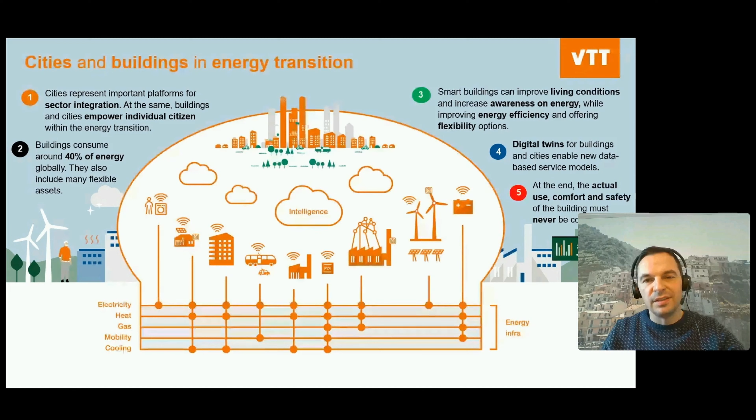The development is, of course, going towards digital twins, and we are doing that very much on our side. This is really an exciting pathway for new, more data-based service models. And just the final point here: it's always important to keep in mind that the actual use of the building, actual comfort, and actual safety must never be compromised, whatever we optimize or provide flexibility from the building.

So our research that is kind of linked into this topic, we are working on demand response, we are working on virtual power plant schemes, and just to simplify, a virtual power plant can be called a collection of distributed flexible assets that can be controlled as one entity towards the market or towards the grid.

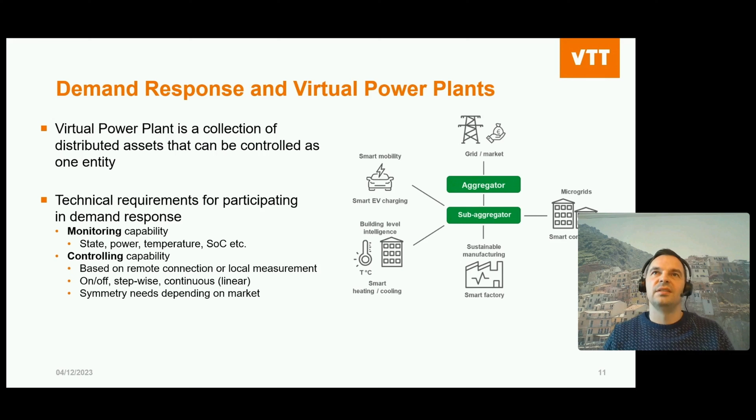And of course, there are two technical requirements for this. We need to be able to monitor these assets, and we need to be able to control these assets. And that's fairly simple as such. But of course, it requires that we have systems, we have the connectivity to different kinds of assets so that we can control them. And whenever you go into smaller and smaller unit sizes, this will be more challenging because it must also, of course, be cost efficient to control them.

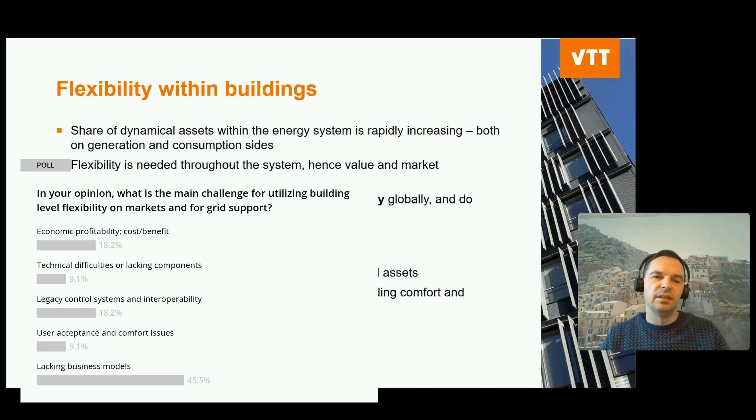So we have been looking at the flexibility options within buildings. I was already speaking a bit about this, and there was also something in the intro. But as said, much more dynamics is now seen in the energy system, and also the consumption side must contribute to the flexibility. And there is true value arising on the markets, and it can be seen that if you are operating a large fleet of buildings, this will become an additional value chain in the future, to be able to control that for different kinds of markets and take out the benefits there.

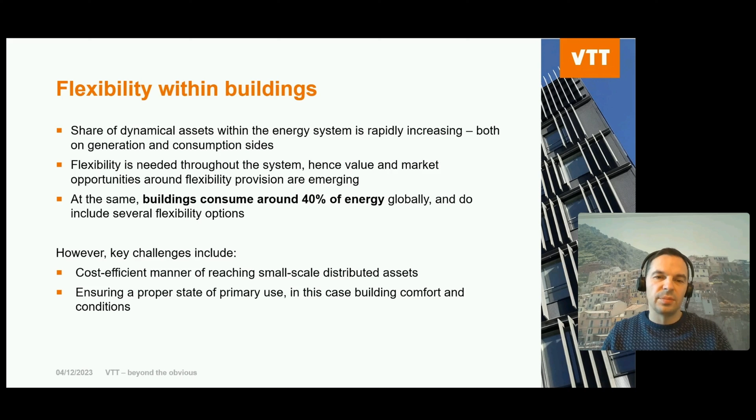Of course, the key challenges I was already mentioning: when you are going into very small scale assets like a single heating unit or whatever, you need to be really cost efficient in reaching that unit. So no massive installations should be used there. And as I already had in the first slide, of course, ensuring the actual primary use of the building and not compromising with that. So we have been looking at sub-aggregator models.

So we are assuming that there are actors who already hold a portfolio of distributed assets, and they also know the primary process or primary service, and they already have a backend system for communication and control towards the devices, and they also have the customer in their portfolio, so to say, but they are not really active on the energy market at the moment. They don't have balance responsibilities and these kinds of factors.

And of course, we have some examples here. The EV charging operator is a very typical such case. Heat pump providers, we actually already have commercial services emerging in this area. Different kinds of building management systems, that's a really developing area. But actually, when you start to think about this, there are many areas in society where you can find these kinds of things. So there are remote connections for maintenance and monitoring, but not really a utilization in terms of market flexibility, for instance.

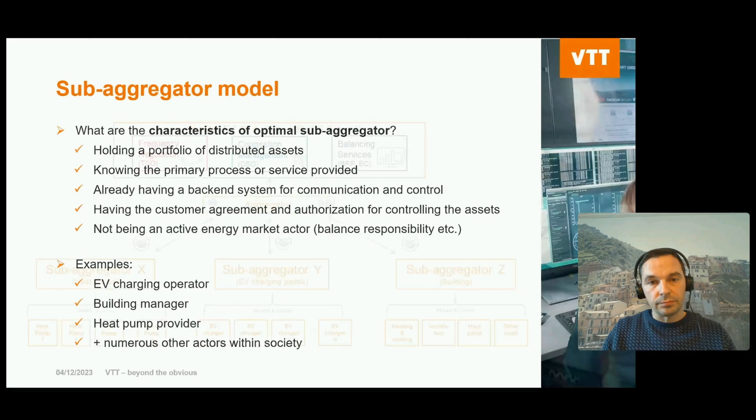So how our model works. We are kind of introducing a new actor in a sense. So we have an aggregator towards the market or towards the grid services, and then we are introducing the layer of a sub-aggregator, or a technical aggregator, who has the features that I was already speaking about on the previous slide. So they do have the backend system for monitoring and controlling the devices. And there are different kinds of those units, of course.

What is important here is that this is not only a technical model. Actually, the technical solution is a small part of this. Instead, we are working on the business model side. What are the market rules? What are the logics for responsibilities, who will allocate what, and so on. So there are actually a lot of things, going into the level of contracts also, who has the final contract with the final customer, and so on.

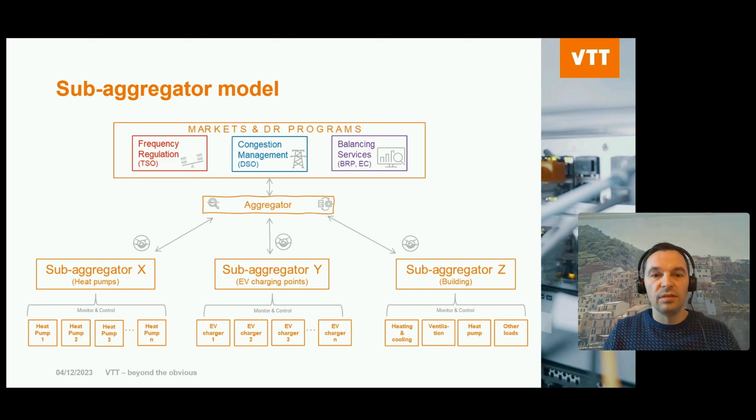What is the model for sharing the economic benefit also towards the final customer? So these kinds of things we are working on very much at the moment. And as I said, this starts to look very applicable in different areas of society, also of course within buildings.

These are just examples, but there are some important areas we are looking at, like on the left-hand side, how to share different responsibilities and benefits. For instance, who takes care of which process. On the other hand, in the middle part, what is the actual interface? This is from the EV charging case, but there are different ways of doing the actual interface, whether you're installing something more or whether you are opening or selling your back-end system to an external operator to some extent. So different logics, and we are looking at different

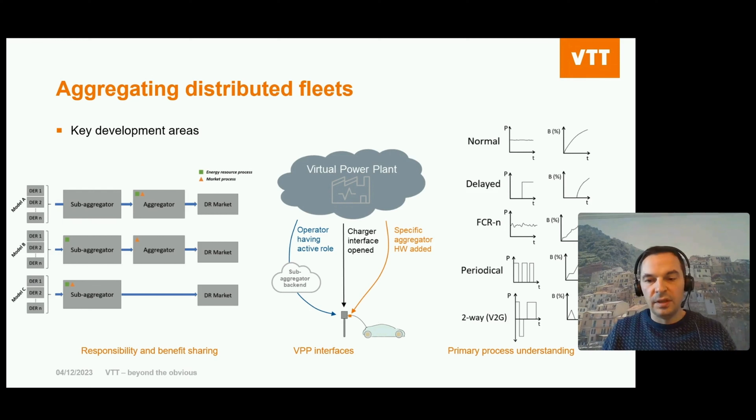opportunities there. And of course, on the right-hand side, you need to understand the primary process. Again, here we are speaking about EV charging in the example, but you really need to understand what is happening there in real life.

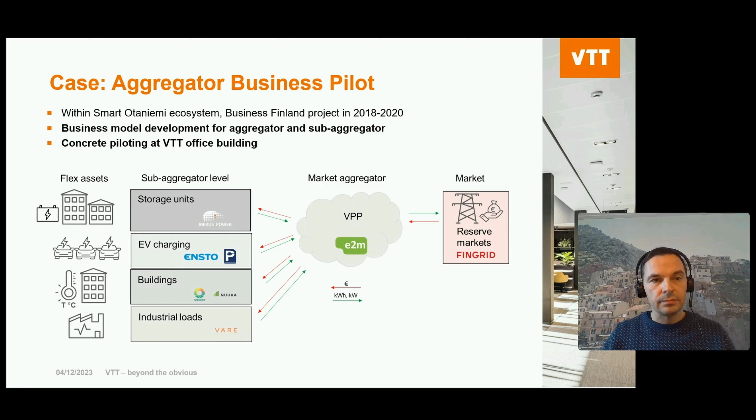I already spoke a bit about this, but this is really important for the building case. So of course, it depends on what kind of flexibility we are speaking about. If we are speaking about longer term controls, if we do, for instance, optimization of the spot price on an hourly level, then we can do things with 1 hour time steps. That can already be quite heavy if we speak about heating or ventilation or cooling. So that can already maybe start to be seen somehow by the final user.

On the other hand, we are also speaking about different kinds of reserve markets, frequency containment markets, where we are normally in time steps of some minutes. So it can be 10 minutes or 15 minutes, or even it can be seconds only, very short durations actually. And now the point is exactly to look at within the building what are the possibilities and which can be matched with which kind of market, so that we can do reasonable combinations. This is important. And this is maybe not done fully at the moment.

And for the sake of this, the controls that we are normally taking are quite conservative, so to say. So we are really careful in utilizing the potential within the buildings. And this is actually where the digital twin can bring in a lot of value. So more real-time awareness of the status of the building, more accurate controllability, so we can go on a more local level in controlling different parts of the buildings. And then of course we have a lot of really advanced functions like human thermal models, for instance. We are also running in our own research platforms different kinds of AI algorithms and so on to forecast how it looks from the user perspective, for instance.

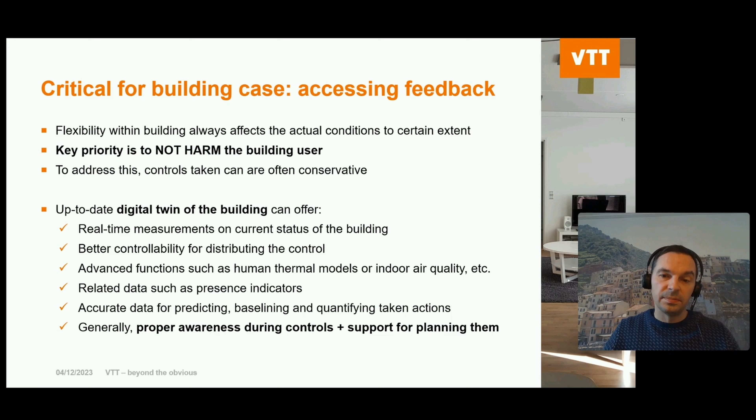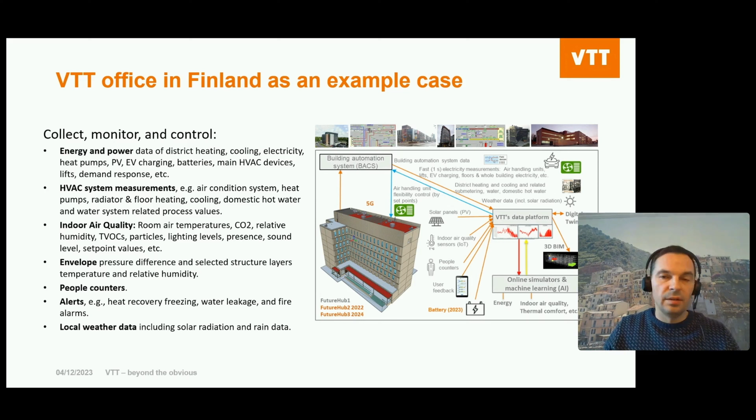I was already speaking about our office, so I will go through this pretty quickly, but this is our new office building. Actually, we have already a second part of that building open as well, in Otaniemi, in Espoo. We are collecting a lot of data. We are monitoring different parameters. We are able to control a lot of things. And everything is brought into our own research platform. And that's our own playing field for all these topics.

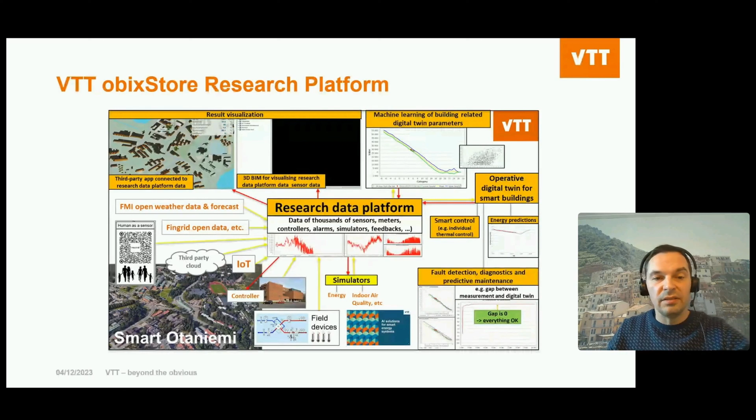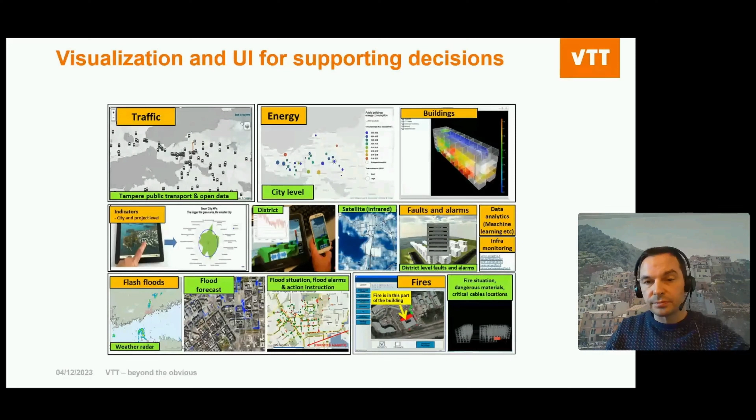So we have things related to machine learning. We have, as I said, digital twin. But we also put a lot of effort on how to visualize the data, how to present the results, and so on. But these are really cool things running there, predicting how the building will be behaving and so on with AI systems. Okay, this is just another slide about the visualization and also user interface side. So different kinds of KPI indicators, different kinds of map presentations, 3D models and so on. So a lot of different things there. But I will skip that.

Yeah, just to conclude, as I said, there is a lot of potential for flexibility within the buildings. But on the other hand, buildings are also kind of challenging because there are the individual users and they have different feelings about their comfort, for instance. So it's also kind of sensitive in that sense. Buildings are also quite diverse. So there are different kinds of buildings, different kinds of uses. But on the other hand, if you look at a bigger mass of buildings, then it starts to be more and more similar and more predictable when looking at the whole building fleet.

Yes, building management, building automation, that can be the shortcut, so to say, into this kind of sub-aggregator model. And I was also already speaking about digital twins.

As a final note, as I said, these different kinds of flexibility options, these different kinds of sub-aggregator roles, can be found everywhere when we start to look around. So there are pumping stations, there are different kinds of heating or pressurized air stations where you have some kind of a buffer, and you also have a remote connection there. And these are really interesting places we are currently looking at.

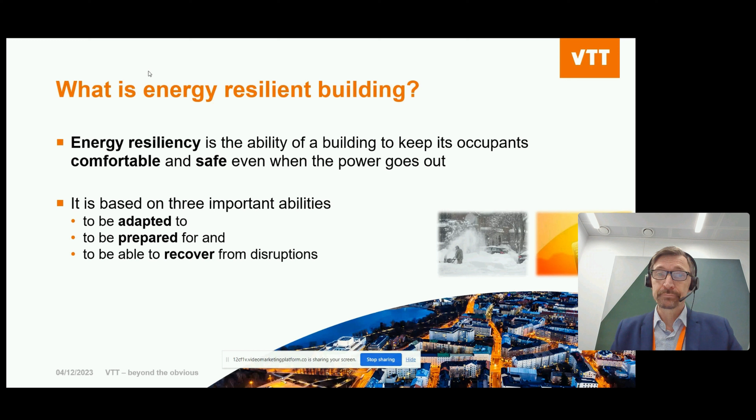Then, what is the approach? How do you do that? As I mentioned, the major first step is increasing the energy efficiency, because whenever you increase your energy efficiency, the design loads and everything go down, meaning that whenever you need some resources, they are smaller, of course. And maybe this kind of mindset of 50% energy efficiency improvement is a good basic approach to use as a starting point when you start to plan your building.

And then the second step is quite evident, but our buildings are not designed like that today. Whenever you have so-called important end uses in the building or not so important end uses, you have to make a distinction between those. So usually in the design phase, for example for electricity, you make a priority group of what people need most. So cooking or microwave ovens to make some warm food for themselves, storing their food, so fridges and freezers. And of course, lights are needed so you don't trip or stumble inside your house in the dark.

And maybe the last one could be communication connections for you. Whenever there's an emergency situation, you need true communication from the government and the information flow so that you know what's happening in the society.

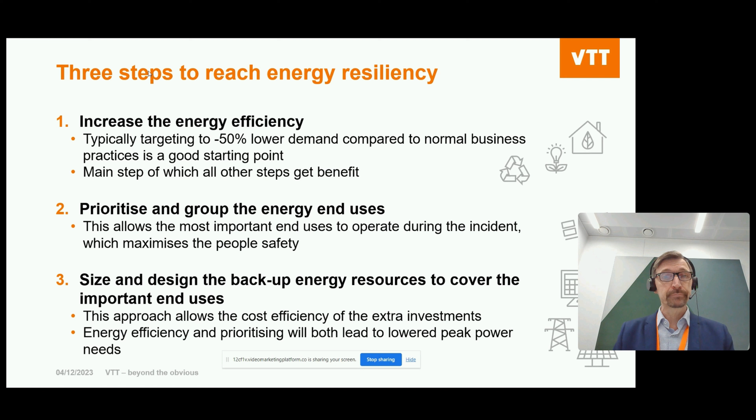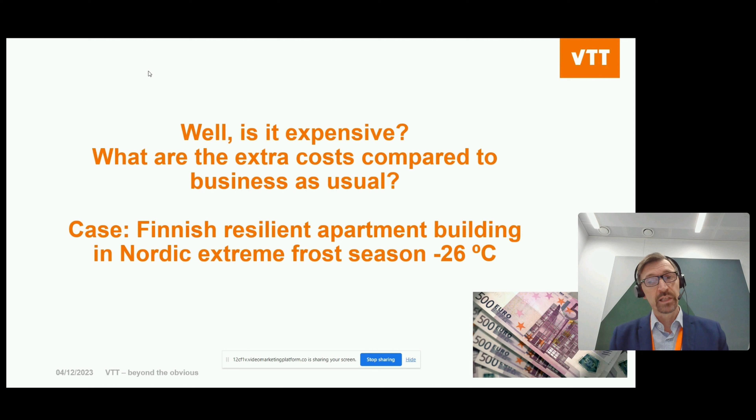And then the interesting question is how much would it actually cost? This cost study is related to a really extreme season, -26, and it's an apartment building application. This building happens to be designed, not exactly, but quite the same way that we have here. I'll show you the picture. This is located in the capital region here in Helsinki.

It's one of our pilot buildings in one of the EU projects that we have had, and the local HVAC and energy designer made quite an exhaustive study related to the cost efficiency of the thermal losses, windows and ventilation system, and what kind of solutions there should be. And it's quite well aligned to the target that we have here. In this study, we made an extra simulation in which we used a little bit better windows, really extremely good windows.

So the location is here in the capital region in Helsinki, the southern part of Finland. We have heating degree days here in Finland of something like 4,000, if that number tells you something. And this building is something like 7,000 square meters. It contains 100 apartments and about 200 people are living there. And it has local energy production, so a ground source heat pump is there. And we had 600 meter deep, or medium deep, boreholes for that, because in a dense urban environment, we don't have much room for borehole fields.

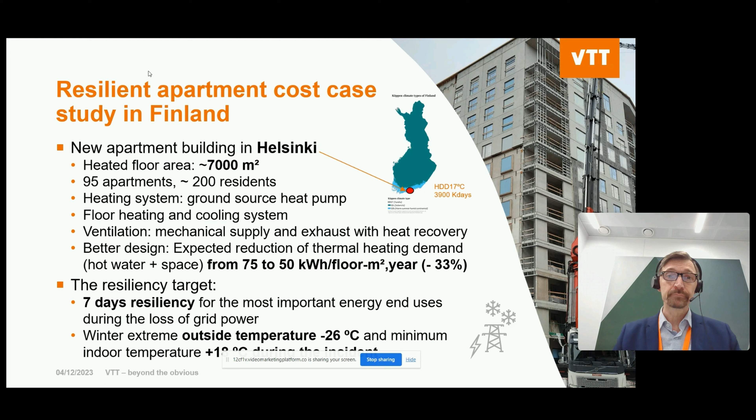And then I'll list here some examples about the cost items. What does it mean? These are not in any specific order, but as an example, the main message here is that whenever you make this kind of resiliency, there are these kinds of small items, those are the extra costs on top of the existing business as usual application that we have, so there are these kinds of 10s or 20s per square meter. This is the main message, except the batteries.

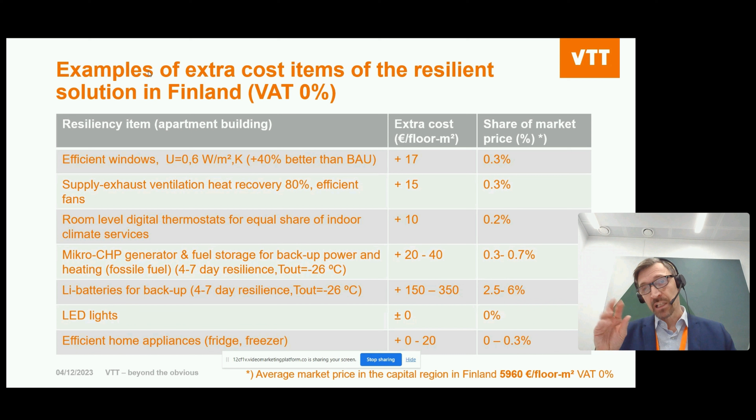So the lithium-ion battery technology seems to be quite expensive, so if you use this kind of battery only for 7 days, it will have a huge cost impact, and maybe a negative one, because 350 euros per square meter is quite a heavy cost. But anyhow, the main message is that it's something like 0.3, 0.2, compared to the market price of the capital region on average. So these numbers are VAT zero numbers, as an example.

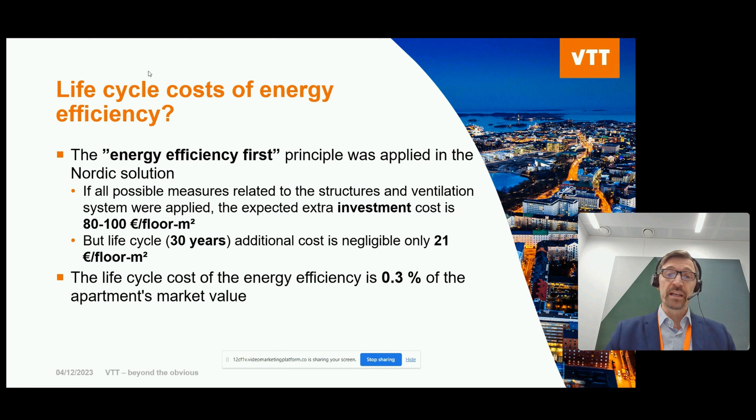And then we figured out the energy efficiency if we invest in it. The typical change from business as usual to a really energy efficient solution, this kind of resiliency solution, the extra investment is something like 100 euros per square meter in the beginning of the project. But if we take the whole life cycle of 30 years, of course you consume less energy, and then you get most of the money back. Actually, the additional cost is something like 20 euros per square meter. It's quite negligible, so it's not a heavy cost. So something like 0.3 is the extra value of energy efficiency.

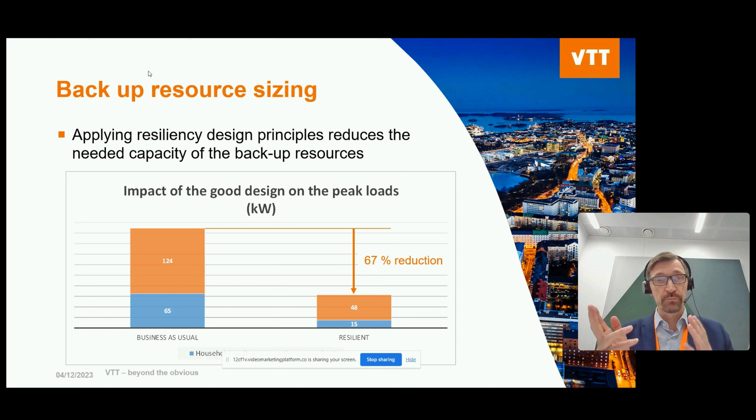And then what does it mean in a picture if we compare the business as usual solution and the resilient solution together? In business as usual, you don't have any extra measures related to energy efficiency or prioritizing the end uses. With the resiliency planning, we have a design that is energy efficient and also prioritizes and groups the end uses. So you easily get a 67% reduction in the backup load sizing or backup resource sizing. So that makes it actually quite cheap.

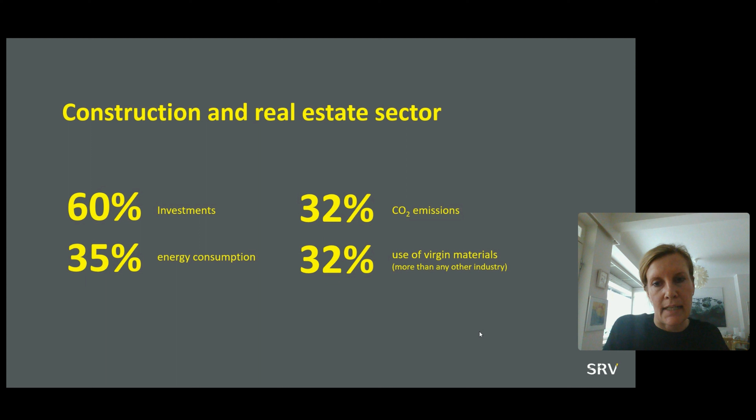And then, as Tuula was also pointing out, we are using quite a lot of energy, over 30%, and also over 30% of the CO2 emissions in Finland originate from buildings and real estate. And most importantly, we are using more than any other industry the virgin materials, and this is linked, of course, to the energy used, but also to biodiversity and what we are doing for nature. So the energy things are strongly linked to biodiversity as well, as Tuula was mentioning already in the beginning.

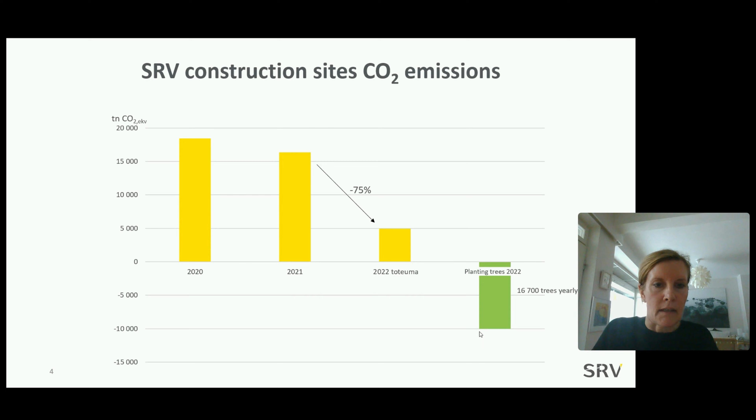But then in addition to heating and cooling demands, we are focusing quite a lot also on water use, because when we are using the water, we need to heat it up to a high temperature due to Legionella and other bacteria. So flexibility in there is super important. The less water we are using, the more flexible we can be from that perspective as well. And then of course the wastewater amount is much smaller. So this is important for us.

And then of course the integration of renewable energy: we almost always have some sources of renewable energy in our buildings. Typically it's PV, ground source heat pumps, but also other types of heat pumps. And then when we think about why we would do this flexibility, it should be value for us, but also value for our clients.

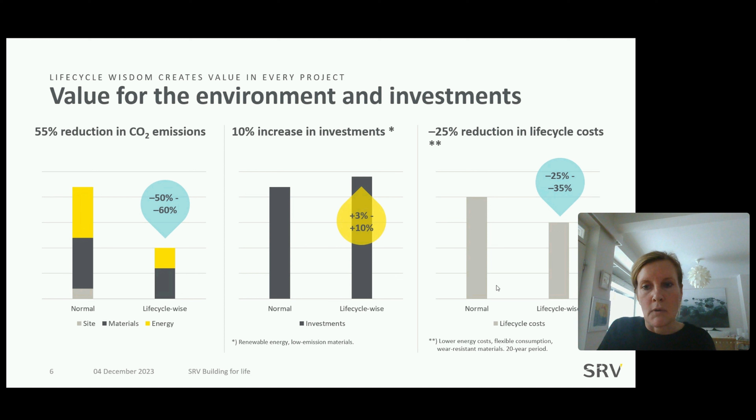Well, then of course we need to think about how we are doing our business, and this is our recent study, and this is not only from us, but also JLL and CBRE. They have found similar kinds of results. So what we can see is that those buildings which are energy efficient are using less energy and they are sustainable in the long term as well. So we can see that the green premium in the sale varies just under 10 or just over 10%. So this is an extremely good and important thing.

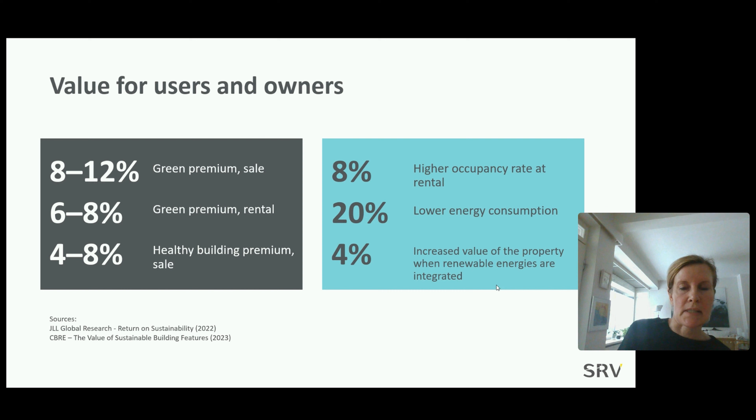And also the healthy building premium is rather high as well. Directly we can also see an increase in the prices when the renewable energy sources are integrated in the building. So then the value of the building is higher. And of course, super important, especially in other than apartment buildings, is the rental rate as well. So in green buildings, the rental rate is higher than typical ones. So this really shows that it's not only for us that this is good business, but for our clients as well.

And there are actually two ways how we are working in these ones. Typically in those city-owned buildings, we give the cities the possibility as well. We can stay there 20 years with you, and we then manage the maintenance services, including the energy services. And here our business model is that,

if we get low energy use and still the indoor conditions and user satisfaction are good, then we get some profit and we are sharing the profit with the owners. Or, if we are not in the target line, then we need to pay the penalty. So it really motivates us to do our best in the whole maintenance period.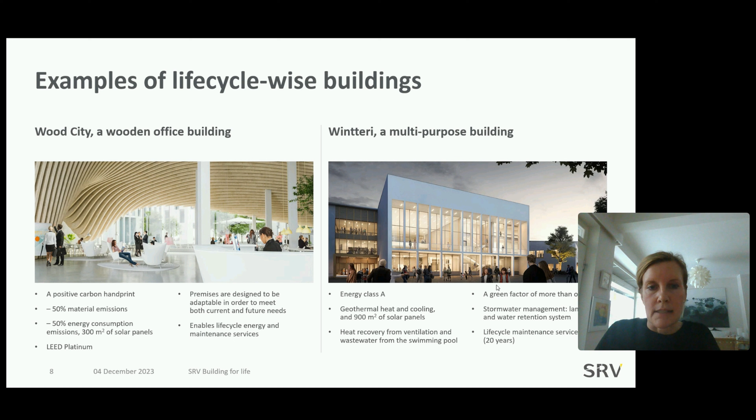And what we have seen recently is that usually when we are staying there in the building and managing the building in the long term, the users are more satisfied, they're happy with the conditions, and also they can give us direct feedback on how this building should work, and also the cost for the energy is lower. So this looks really good from that perspective, that not only one is winning, but really both sides are winning in this type of building business model.

Well, then when we think about it, because the world is of course not perfect yet, what we need, especially for the future, is even more smart and really resilient systems, because currently we are relying quite a lot on the grid for our resiliency, and we can do some optimization inside our buildings, but we don't typically have storage in the buildings.

Well, for the heating, this is not that big a problem, because typically buildings are massive, and we can cut down the heating for 1 hour or sometimes even longer, and people won't get that bad thermal conditions inside the building. But then of course for lighting and ventilation, we need our systems to run in order to get acceptable and comfortable conditions for the users.

So there we need not only building systems, but also systems for blocks of buildings, in order to manage the system optimally and not only sub-optimize one building, and that's of course more cost efficient for the buildings as well. So really optimizing the area, not only one single building.

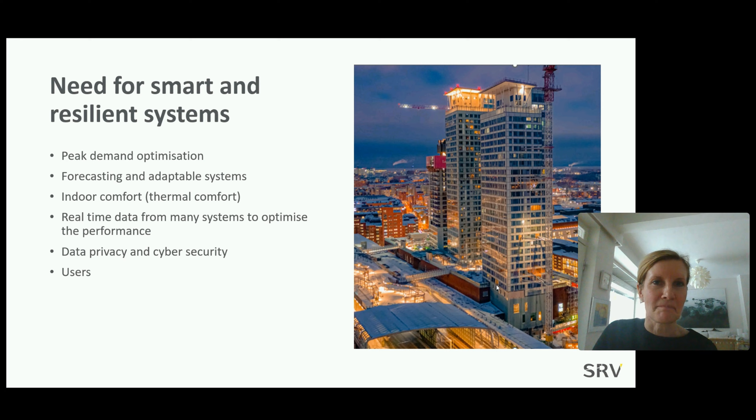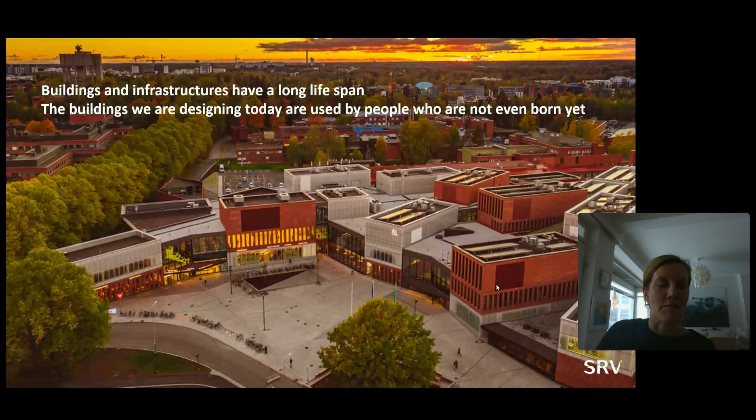And when we're building these buildings, they have a long lifespan. 30 years is the technical lifespan for the systems, and for the structures it is 100 years. And of course, we hope that the buildings are there for more than 100 years. So that's why we need to be really flexible, not only in the energy system, but also in the layouts, because we are building for people who have not even been born yet. So we need to give them good conditions, and that's why sustainability is such an important topic as well.